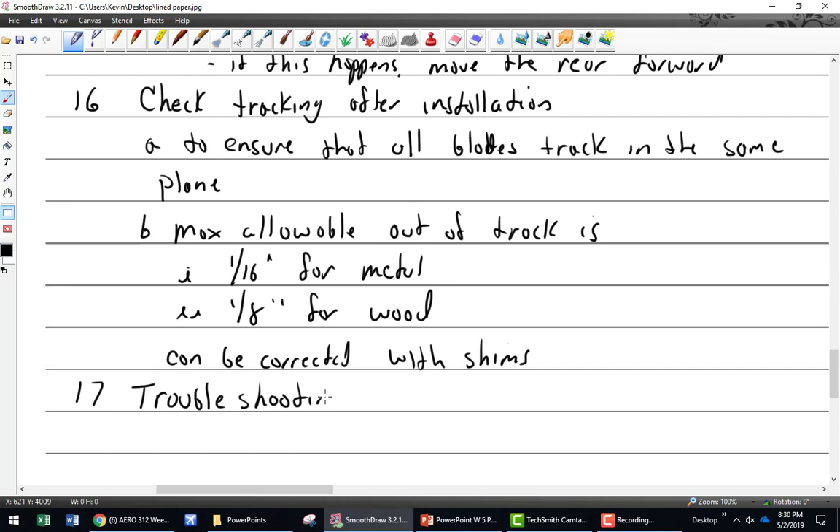Just because I don't write it down doesn't mean you don't have to write it down.

So, troubleshooting. Customer says, man, I just have so much vibration in my engine ever since my last annual, or ever since some maintenance was performed. The question is always, how long have you had that vibration? Like Tyler says to me, ever since I had the starter changed. So why is it vibrating? Because the starter was changed.

What's out of balance? Everything's out of balance, Tyler, it's your plane.

Any thoughts? Was that a tough one? You don't know your own plane? When does it vibrate? As he's flying it, and the higher the RPM, the worse it gets. Starter loose, maybe. Key in on the starter. In order to change the starter on his plane, you need to take the prop off. Like we're gonna know his plane? He knows his plane, right? So he's got like a Cherokee.

I always think about something like that. You have to take the propeller off, and now it suddenly started vibrating after the prop was taken off and put back on. What do you think could happen? Installed at 180 degrees off. So there's one, you can write that down if you want. Try rotating it 180, maybe that'll fix it. I've seen that cure most vibrations. Also, make sure it's installed correctly. Go to top center, is it actually keyed in the right way? Maybe it was a one bolt hole off, and that's not happy for the aircraft. Maybe it was a wood prop and they torqued it in the wrong pattern, or over-torqued a wood prop in the wrong pattern. So how would we verify that?

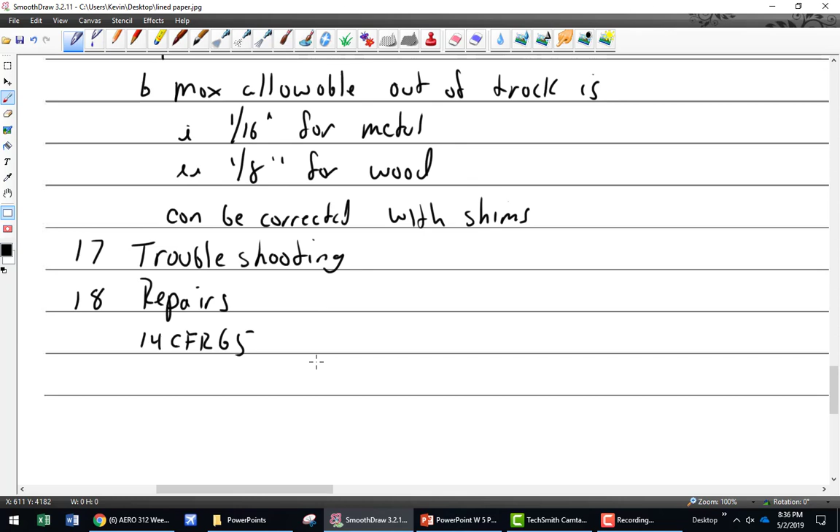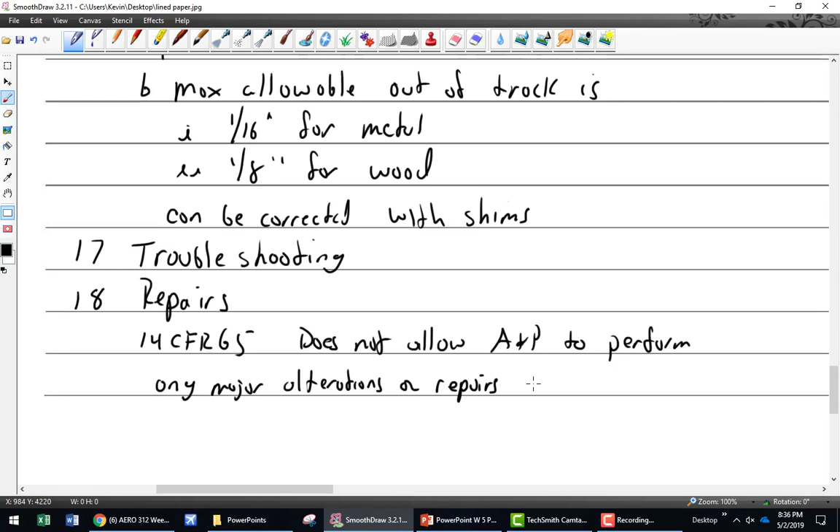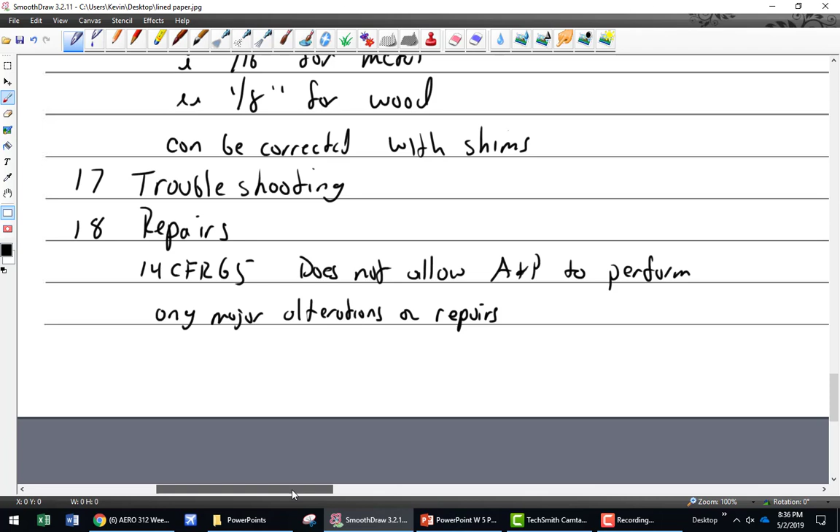FAR 65, mechanics, very good. That is the rules we live by. It does not allow A&Ps to perform any major alterations or repairs. And most everything is about a major alteration or repair. The most I would really do to a prop would be a refinish, paint refinish, minor nick repair, but not much more than that. It's just there's too much stress on a propeller.

And I've worked with some A&Ps who have been in the business for a very, very long time, and they weren't afraid to do anything. But when it came to props, it was like, nope, you call the prop shop. You don't touch it. Everything you do, you call a prop shop because they have better manuals, better data, and know what they're doing - repair stations.

Can you take them off? Yes, take them off, put them back on. Of course, that's not a major alteration or repair. So you can always take them off, always put them on.

So who can perform major alterations or repairs on props? A certified propeller repair station, because just the word repair station doesn't mean that you are. So there are instrument repair stations, propeller repair stations, airframe repair stations - your repair station license tells you what you can and can't do.

Let's put some of this stuff down. Wash props with fresh water after salt spray.

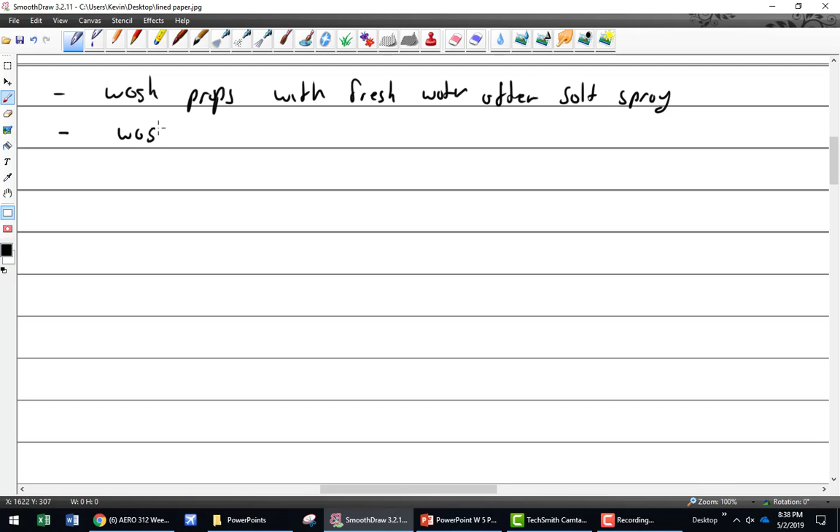Isn't that a Q&A? Yeah, that's why I wrote it. What kind of wash should you use on propellers? They make a special type of wash for propellers. Tim, what is that called? Prop wash. There you go. Joke - that's the wind that comes off the prop, that's called the prop wash.

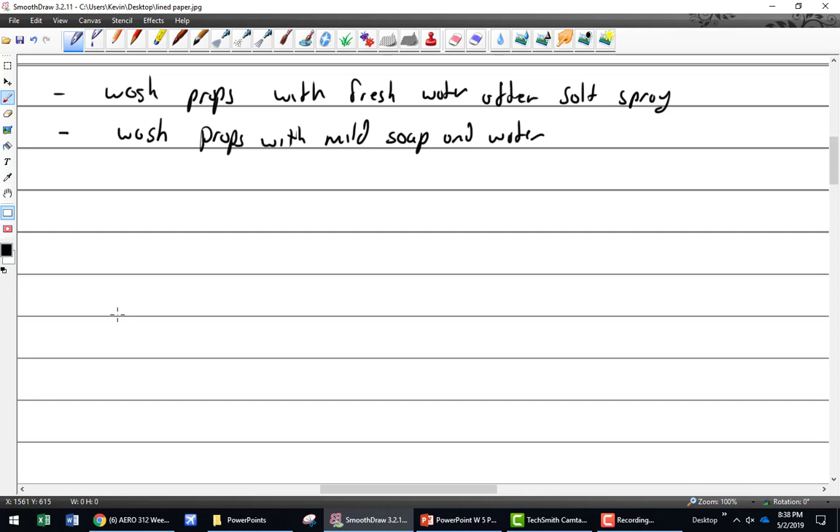Wash props with mild soap and water before inspections. All right, if you have minor damage, it can be repaired.

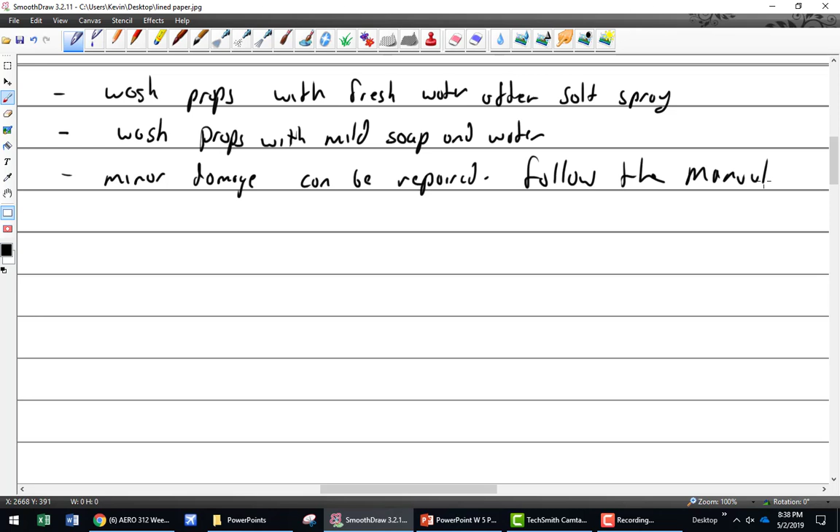Follow the manual. All right, the problem with manuals here is that most shops really don't own the propeller manuals. It's just something, I don't know what it is, it's just the way it usually goes. So a lot of A&Ps default back to 4313. But AC 4313 should be used when you have the manual and it doesn't state what you're looking for.

So if you had a propeller manual for a very old propeller and it's a very thin manual that just says - like the manual you guys are using over in the lab, actually, I'm sorry, that one does say stuff. Some of the older manuals say nothing about repairs. Well, then you can go to 4313. Otherwise, get the manual for that particular item and follow it exactly.

I have some old manuals I need to bring across the street and show you guys on some props, and they're really cool. But follow the manual for the repairs. I don't want to give you any specifics because it's going to depend on the manual.

But basically, you can blend out minor rock chips and dings. In fact, when doing an inspection or a pre-flight on an aircraft, I always run my hand down the leading and trailing edges to feel for any sort of nicks or cracks. Because what happens when a propeller has a little tiny nick in it is that nick becomes a stress riser, and that's exactly where it's going to start to grow and snap off.

Often, propellers that have been in service can get a little rough looking. A prop should never look like this, all rough like that.

During inspection, it's your job to run a dressing file down the entire length of the prop. Sometimes you're allowed to do that. I use little jeweler's files to take out some of the imperfections on the top from hitting bugs and small rocks, and sand and paint on the back of the blade.

What color should the face of the blade be? What kind of black, matte black or flat black? I use flat. Why flat? It doesn't shine, so you don't get that flicker vertigo. Little tiny cracks become big cracks, and big cracks become missing pieces of propeller.

Is there any circumstance where you can drill out a crack or stop it on the prop? Nope, none at all. How much stress is on that prop per pound? About 4 tons per pound. Nope.

For many years, there was no definition of the term prop strike, it was just left to interpretation. But then I think it was Lycoming, either Lycoming or Continental, they were the first ones to come out with a prop strike definition. Anything that requires the propeller to be removed for repair was considered a prop strike, which meant a lot of aircraft are subject to a prop strike inspection. If you run it up the back of a BMW, that's a prop strike.

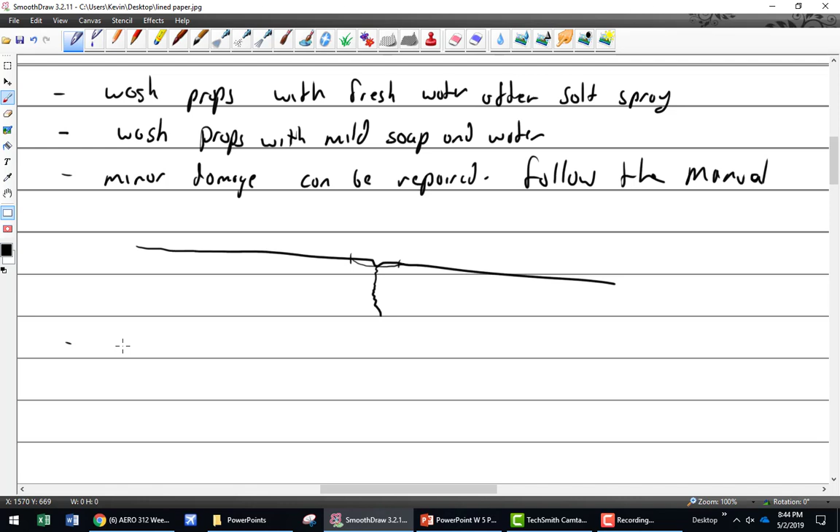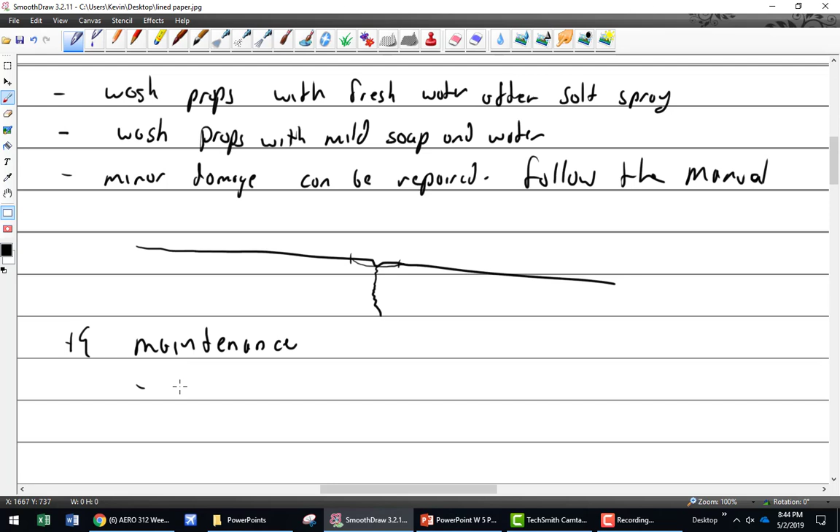All right, some maintenance ideas. Of course, under maintenance I always check, I know it's not the prop thing, but I always check RPM for accuracy. I say it often, so it must be really important to me. They're usually off, so always check that.

Juan brought in his Hartzell book out of his aircraft, and it has a chart in there for overspeed limitations. So not only do you have overspeed limitations on your engine, but you have overspeed limitations on your prop. The prop is well outside of the engine, so by the time you've oversped the prop, you've really oversped the engine.

Check for accuracy of the tach. I talked about wood props, always make sure... wood props require delicate maintenance. Wood props, last I looked, are $1,600 to $2,000 for a low horsepower prop, which is pretty cheap for anything on an airplane. Obviously you'd inspect for cracks, delamination, dents, warping, damaged bolt holes, and crushed mounting areas. You guys should be getting familiar with basic nomenclature like that.

If you do have a prop that's been crushed a little bit and it's a little crooked, how would you fix that? Buy a new one, or send it to a repair station. You can add shims in some cases to the back of the propeller to realign it. I have never done that, but I've taken apart some aircraft propellers, removed them, and there are shims going halfway around the flange on the crushed side.

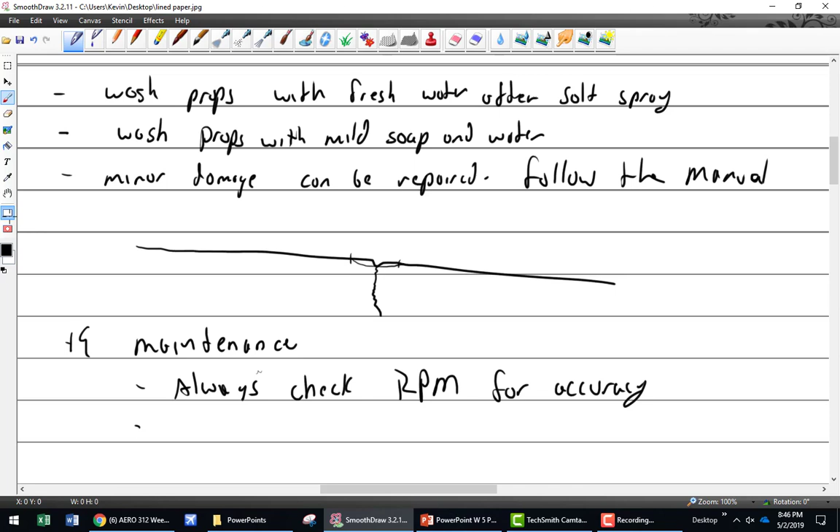So, varnish as needed, face is flat black, check torque. The torque for an AN4 is only 140 inch-pounds, which is not much for a prop, and I check it every 25 to 50 hours. Check the wood prop torque, every 25 to 50 hours, so that's every oil change really.

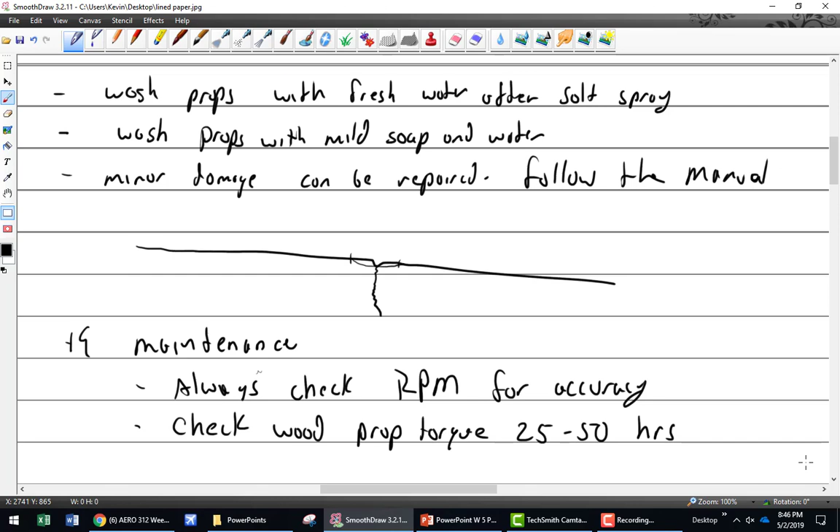Let's see. This is my favorite torque. If you were installing a ground adjustable prop, like the one that you guys are working on, on the front of a Stearman aircraft, would you care to guess what the torque is? Well, I will quote: a man of approximately 175 pounds using a 31-inch rod.

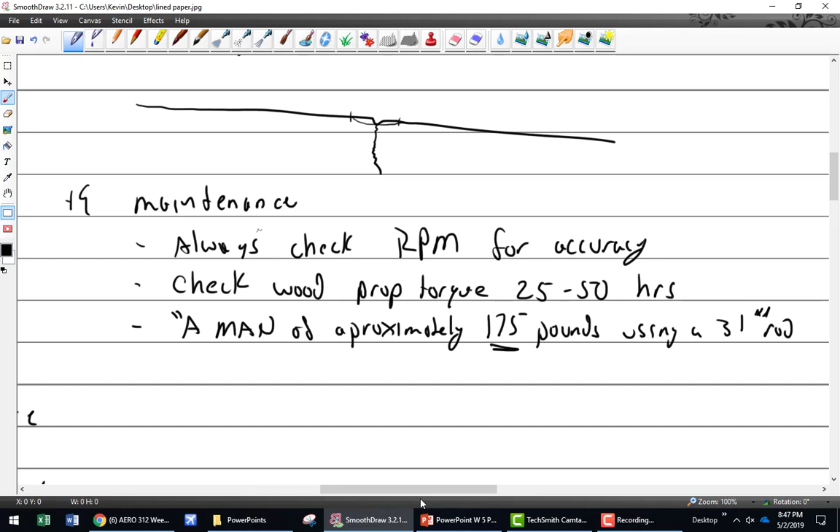So, I need a man of approximately 175 pounds. Does anybody in here qualify? I'm your guy. Huh? I'm your guy. Yeah, all right. So there is somebody who is going to be very useful and have a long career installing Stearman props. We have a calibrated man with a 31-inch rod. I don't. What, do you just hang on it or something? Oh yeah, there's a movie, I may show it, not in this segment but another one, and you actually see the guy bouncing on it.

So anyway, that's about 450 foot-pounds, by the way. And after I install that, what would I want to do? Safety wire. Yeah, check tracking is the thing I was looking for. Oh boy. Okay.

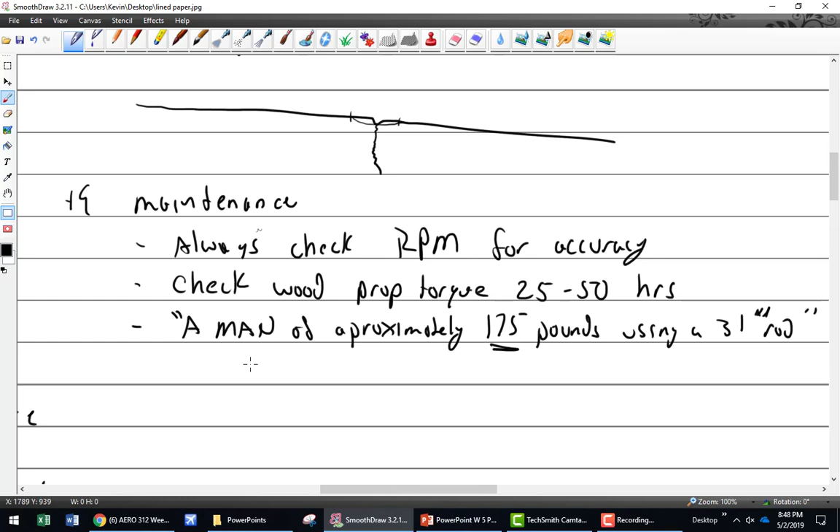And I'm going to see if it stays that way. If it doesn't, it's out of vertical balance. If I want to check horizontal balance, I'll put it this way, and if it does not stay that way, it's out of horizontal balance. Of course, you've got to be careful. You've got to do it both ways, because if this blade is really heavy, it'll stay down there and you won't see any problems. So you've got to check it both ways.

But if your hub is a little heavier in this area, it'll want to rotate and then go horizontal. And if you have one blade that's heavier, it's going to rotate down. So you have to do this in a room that has no air, and you have to check it both ways. Check it this way, then rotate it 180 and check it, vertical, put this blade up, then this blade down, back and forth. If you have a 3-bladed, then you're going to check it that way. So that's static balance.

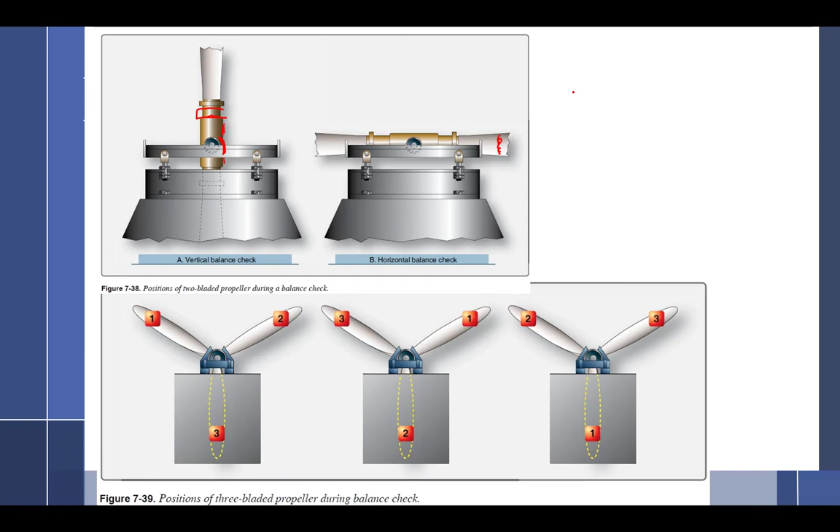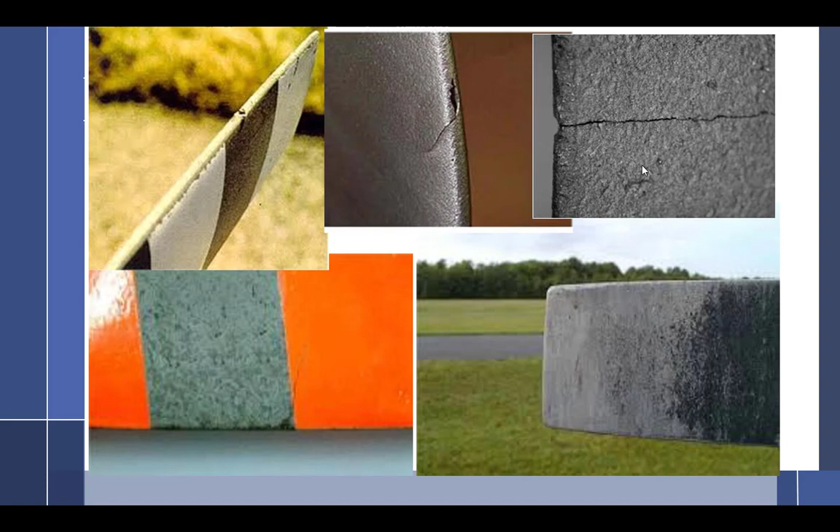Well, let's see. We got that. Talked about maintenance and painting, and you should not let your props look like this. This is out of 65.81. A certificated mechanic may perform or supervise the maintenance, preventive maintenance, or alteration of aircraft. Just write all that down real quick. What are the keywords in here? May perform or supervise the maintenance, preventive maintenance, or alteration. Notice it did not say supervise an inspection.

You cannot delegate inspections. Or appliance or part thereof for which he is rated, but excluding, meaning you may not do, major repairs to or major alterations of propellers. So right there is the law. The federal law says you cannot do major alterations to propellers. It also says any repair to or alteration of instruments. If you're hung up on the word any, I can define that for you. It means all of them.

May not supervise the maintenance, preventive maintenance, alteration. Oh yeah, you can't. I forgot. That's the rest of it. Can't do it unless you have. Have you guys read this section before? This is your law that you will see in second year again, but you cannot do anything for which you're rated unless you have satisfactorily performed the work concerned at an earlier date. So don't be out in the field doing something and say, well, I've never done this before, but I do have an A&P. A&P doesn't cover that. You have to do the work at an earlier date or show the ability to perform it to the administrator.

Who's the administrator? FAA. So you're welcome to go to the FAA office, make an appointment, walk in there and tell them that you would like to do something, you've never done it before, and see how well that goes. First of all, they're probably shocked that you actually read this and knew enough to do that, which might just get you permission. All right.

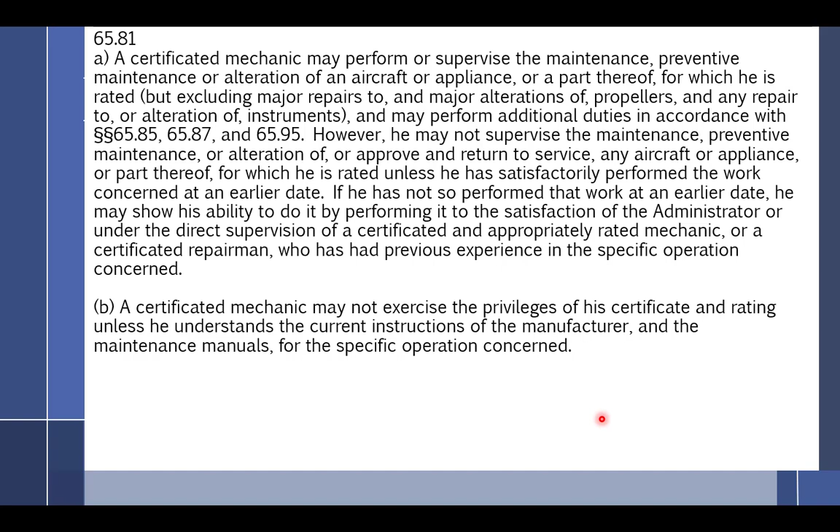FAR 43 Appendix A. What is 43 Appendix A? Without looking at the screen. It's your major list of major alterations and repairs. So what are some propeller major alterations? They are change of blade design, hub design, governor control design, installation of prop governor feathering system. So that means if you have a fixed pitch and you decide that you want to install a prop governor and feathering system, don't. Installation of propeller governor or feathering system. Oh, do you want to install the system?

Installing de-ice systems, installing parts not approved. Major repairs. Any repair to or straightening of steel blades. So any repair. So what happens if you have a steel blade that has a little nick in it? Can you do that? I mean, 43.13 tells you how to blend out nicks and stuff like that, right? Most of them are aluminum anyway, right? Most of them are aluminum. The propeller that you guys are working on, the ground adjustable, those are steel blades. Thing about steel blades is they're hollow.

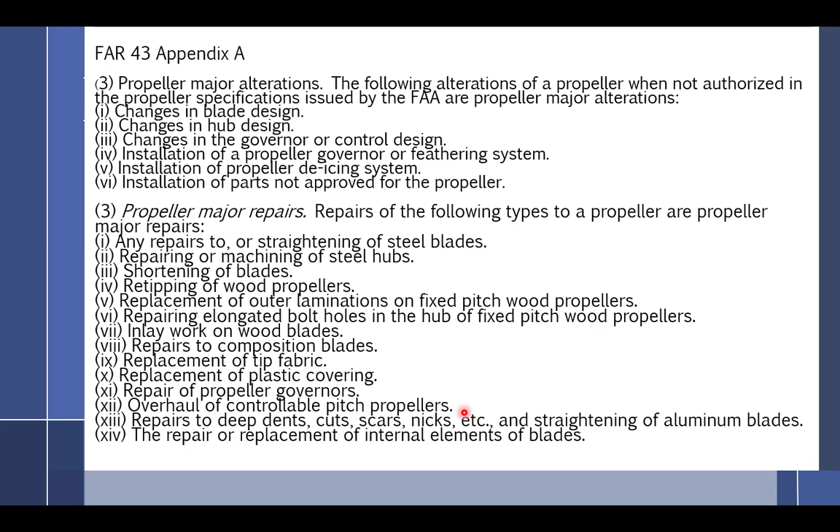Repairs to composite blades, composition blades. So can you do any repairs to them? Yeah. Watch out. Our 172's had a repair done to it. It doesn't say any. I know it doesn't say any, but it says repairs to composition blades. Well, I don't know. It doesn't say any, but I'd say it's kind of covering it. Replacement of fabric tip, replacement plastic covering, repair of propeller governors. Ooh, I think that one catches some people. Pop open a governor, change out a speeder spring. It's so simple, just a little spring, but nope. Of course, overhaul. Man, that's a big job. Repairs to deep dents, cuts, scars, nicks, etc., and straightening of aluminum blades or repair replacement of internal elements of a blade. Once you know your constant speeds, you'll say, yeah, I'm not doing that.

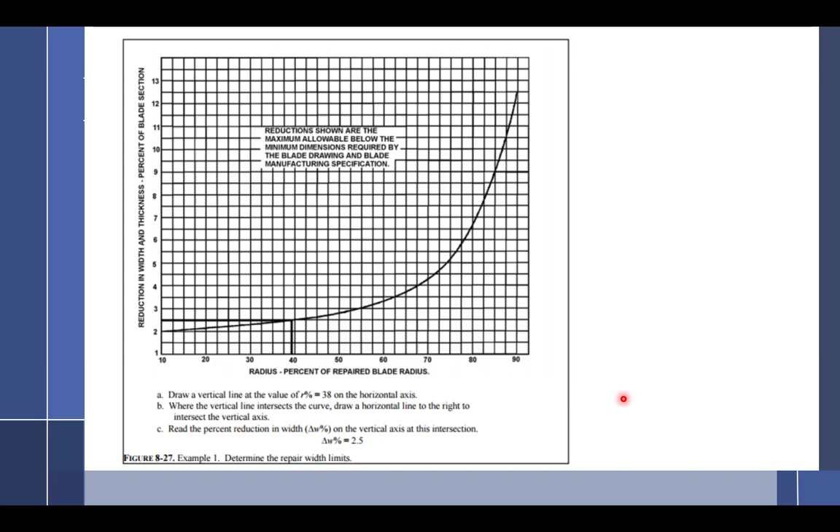This is about 8 pages of getting into something. And this is about straightening blades that have actually been bent. Yeah. I actually just checked AC 43.13 real quick because earlier on I remember that actually the repairs are specifically, it says aluminum propeller repairs. And for steel blades, due to critical effects of surface injuries, and so forth, you can't. It says that, but you know what? Most people just look at the picture. Well, thank you for pointing that out. So it does say that. So, all right.

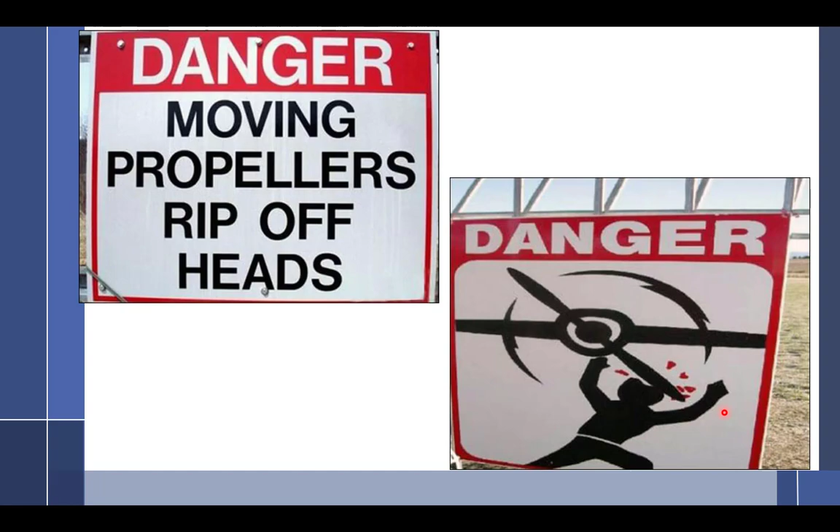I like those signs. Yeah. Every year it happens. I know. I'm not actually laughing, I'm just saying every year it happens, and unfortunately, it usually happens to younger people who aren't aware of it. They run out into props. So, real or fake? Real.